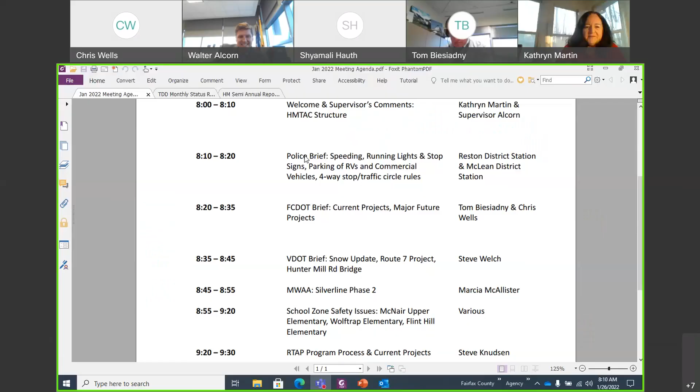Supervisor, did you want me to take off the agenda and give Chris presenter rights again? Yes, please. Okay, thanks. All right, Chris, you should be able to present your content now. See it? Okay, can you see it?

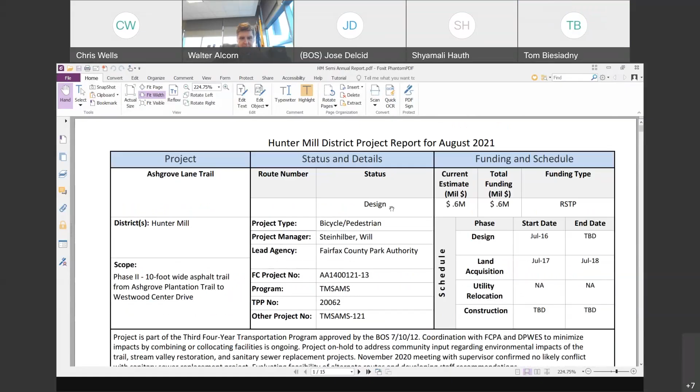So I sent this to Shyamali yesterday, and you guys can post it or distribute it. This is the Hunter Mill version of the semi-annual report to the board on transportation. I'll just go through it quickly. I know we have a lot on the agenda today, so we don't have a lot of highlights, and Steve Knudsen is with us to talk about traffic calming. But I'll quickly do some highlights from this document, and then if anyone has questions on any specific projects, Tom and I can answer.

Here in front of you, the long-awaited Beulah Road Walkway Phase 3, which is the section along Clark's Crossing, has been under construction. That's definitely something the community has been waiting for a long time.

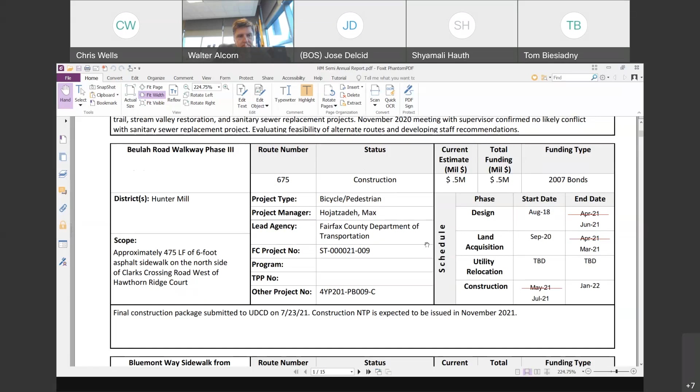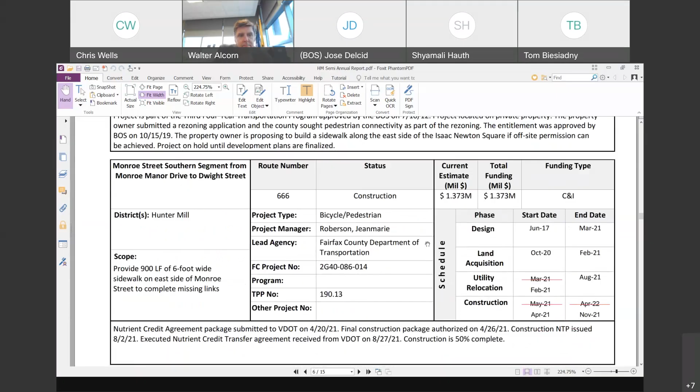Next one is on page 6: Monroe Street from Monroe Manor Drive to Dwight Street is a missing link that serves the Herndon Metro Station. That's been under construction as well for a while, so that's probably nearing completion.

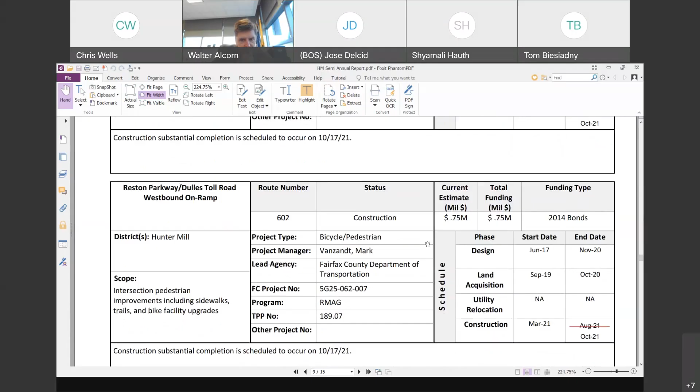Then on page 9, the Reston Parkway Dulles Toll Road ramps. We have both the westbound and eastbound ramps. Those were crosswalk projects, including a signalized crosswalk across Reston Parkway at the ramp, and those have been completed since we last met.

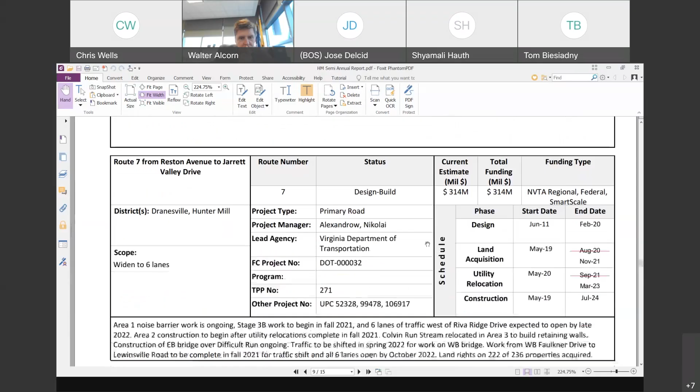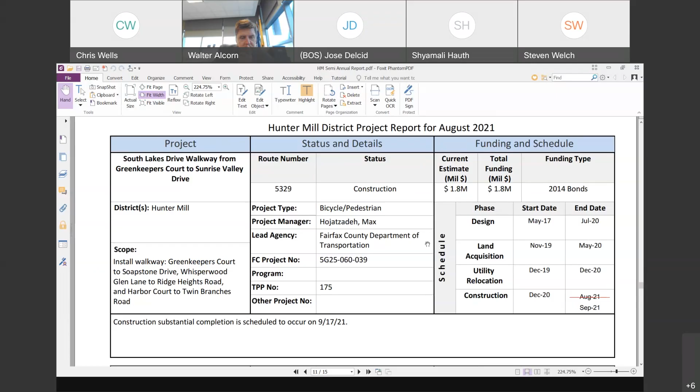Then on page 11, South Lakes' different segments between Greenkeeper's Court and Sunrise Valley - that's Greenkeeper's Court to Soapstone, Whisperwood Glen to Ridge Heights, Harbor Court to Twin Branches. That completes the corridor, so to speak, along, in particular, the area that feeds South Lakes High School, of missing links.

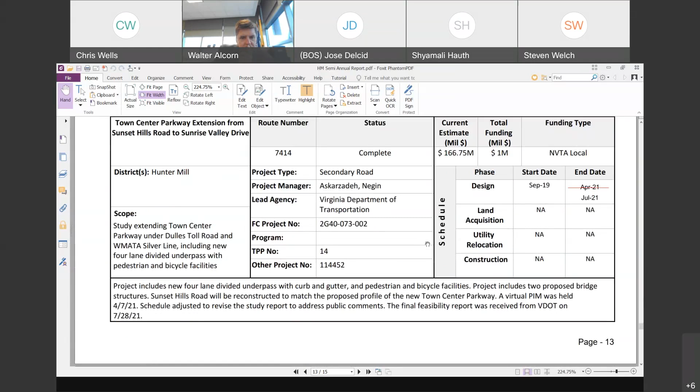And then lastly, on page 14, the Wiehle Avenue W&OD Bridge. The utility relocation has been ongoing, but the actual construction of that project is scheduled to begin this April. That's a year-long or more construction effort, but again, a major project long awaited by the community. So with that, I will take any questions quickly on projects.

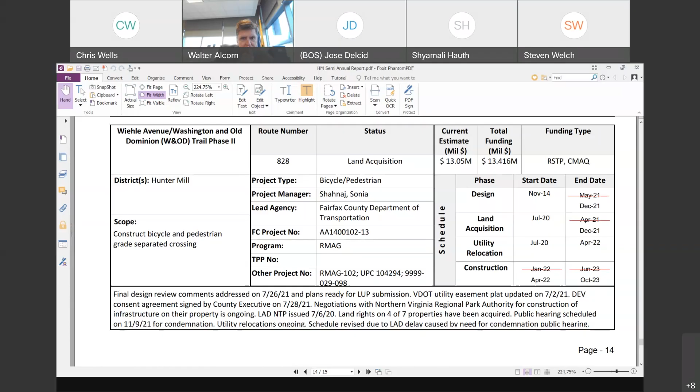Sure. So that's a project that probably this summer, maybe by our next meeting or the second meeting after that, we'd be ready to bring back to the community. Oh, I lifted up my laptop - now my head's cut off.

We are in a task order right now with a consultant where we're doing the preliminary drainage design and the sidewalk analysis. We'd originally been considering whether to just build inside the existing sidewalks, but we're doing an analysis now to see if it makes more sense to also make the sidewalks a consistent width for the 3.5 miles of the project. So it's not a light consideration, but something important to the community for consistency in cross sections. That work is just kicking off now.

We actually briefed Supervisor Alcorn and Supervisor Foust within the past month on that. As that consultant delivers that work, we should have something for this group, and really a public citizens information meeting on the actual project itself - I would say early summer, maybe late spring, but late spring to early summer.

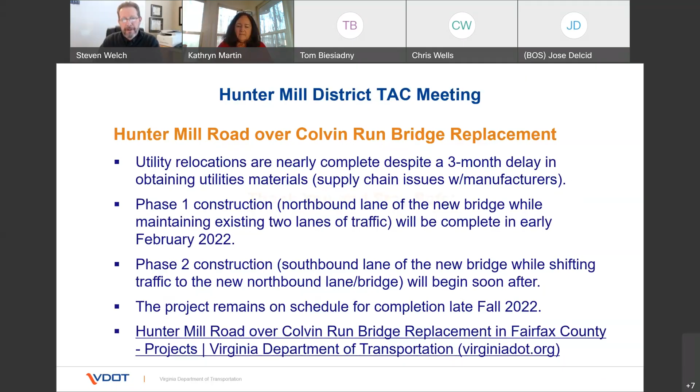And these are hyperlinks so that you can click on them and look up any information you may need. So for now, that's what I had. If you have any questions, feel free to let me know.

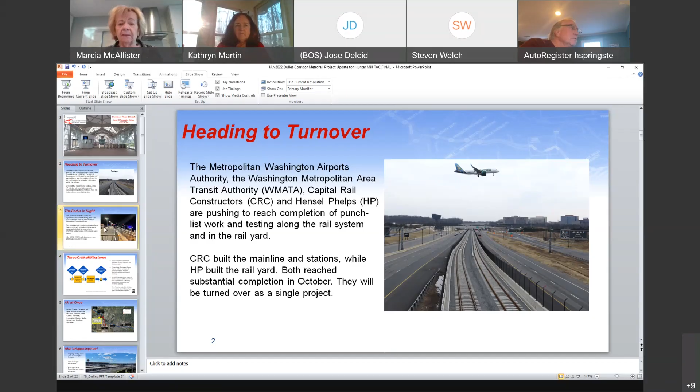And we can say the end is in sight. Unfortunately, we don't have what the end means to the public, which is opening, and we don't have a date for that.

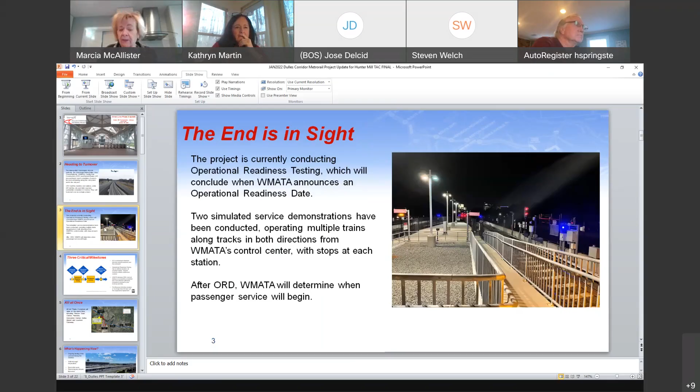As I said previously, the project is conducting operational readiness testing, and the difference in the testing that's going on now is we're doing the testing to prove to WMATA that we're ready to turn it over to them. When they can take it over and move into their own operational readiness testing is still a little bit up in the air - we're hoping within the next several months that will happen. Then at that point, WMATA will take over the line, but will be responsible for doing testing of their own, where they can be even more satisfied that this is going to be a safe and reliable project.

At some point after we moved into this, this chart has been used a lot. I don't know if anybody on this group has seen it, but it explains the milestones we're moving through now that I've been reviewing. If anybody would like this slide, we'll be happy to share it with you.

It's a WMATA slide, and it really does outline what they're doing. During this period, as I've said, we're headed toward operational readiness, and once we get to that phase, there's no time frame on it. It's however long it takes WMATA to complete the testing and get all the paperwork submitted, and then they can set a revenue date.

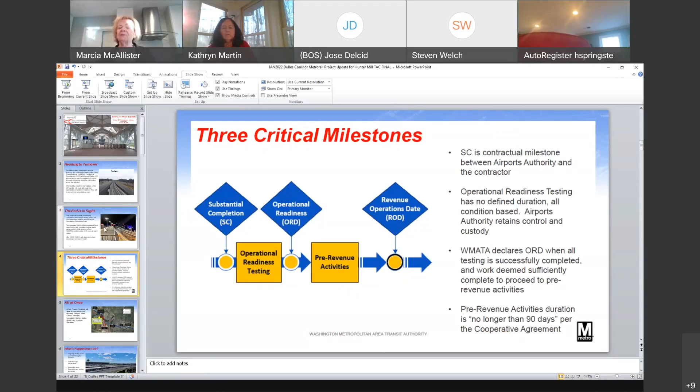But at this point in time, WMATA told me last week that the best estimate on that would be late spring. And late spring is not specific, but I think if we've learned one thing on this project, it's better to set a time frame than to put out a specific date, because we create disappointment and unhappiness when we give a specific date and don't make it.

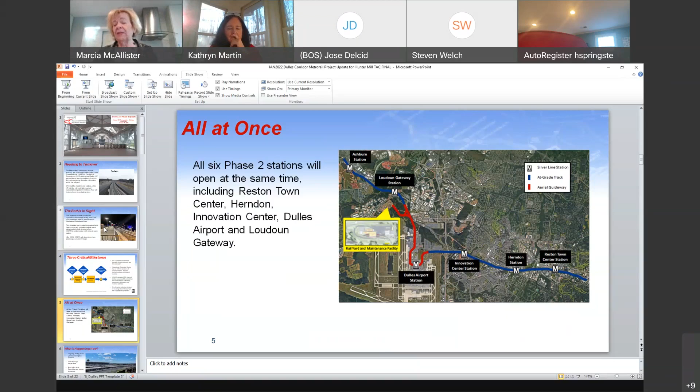We get this question all the time: is my station going to open before the other stations do? But all 6 stations will open at the same time, and I hope that assures people that one area is not going to get service before another. It's a continuous line, and you can't open it without the entire line.

In addition to the testing going on, we're doing a lot of walkthrough inspections, punch list work, and completion of lots of paperwork. That paperwork includes turning over all documentation to WMATA showing specifically what is built in every part of the line, in case issues come up so they'd know how to deal with it better in the future. When we do walkthroughs, it's like walking through your house—something's going to be out of place, maybe chipped paint or something like that. We walk through, WMATA walks through, the counties walk through, and if issues arise, we fix them as quickly as possible.

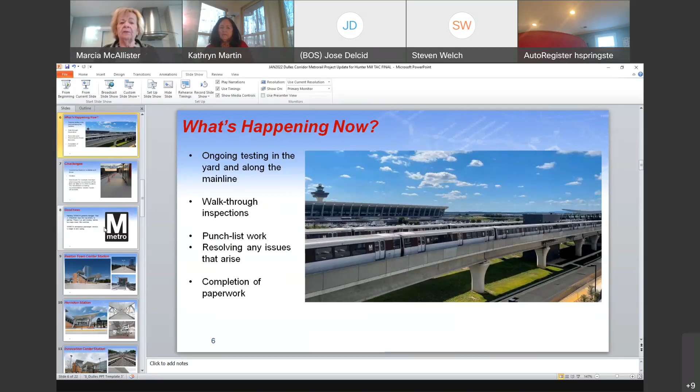We've had some challenges recently, especially since Christmas. The COVID impact on available workforce has affected the contractors, the subcontractors, the Airports Authority, and WMATA. When WMATA doesn't have crews to adequately run test trains, we can't test. When we don't have the right forces on hand to inspect and do things, it causes delays. Sadly, for the rail project, we've seen the effect of COVID more recently than we did last year.

The weather also has played heck with testing and working on the rail yard and on the line a bit. We've been able to proceed with inside work, but I think VDOT has a bigger job in this than we do for the public impact side right now.

One of the new issues that surfaced during the walkthroughs was problems with heat tape. Heat tape is a strip with electrical wiring heat devices inside it. It's attached to the third rail, and it keeps ice and snow from freezing on the rail. This was discovered during a walkthrough. It's not an uncommon problem on existing rail lines, and repairs have to be made frequently because the tapes do wear out.

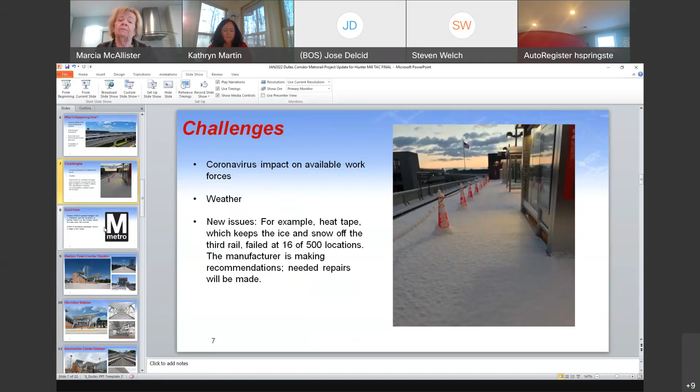Right now, though, most of these heat tapes have been in place for about 2 years, and during the walkthrough, there were 16 of 500 locations with problems. The manufacturer is on site doing root cause analysis, and we'll start repairing it as soon as their reports come in, which should be in the next week or so.

This is really good news. Not that Paul Wiedefeld is retiring—that's not good news, because he's been great to work with on this project—but he told us this week that his top priority before his summer retirement is to get Silver Line Phase 2 up and running. And as I said previously, he does expect passenger service sometime in late spring.

I'm going to show you some pictures, because I think at this point people are more excited to see what the stations look like and what's going on along the line than to just listen to me chat. This is the Reston Town Center Station—these are our latest pictures. As you can see, there's a very tall building in the background on the opposite side, which is, by the way, a Clark Construction building. Clark is also building the rail line—it's just a coincidence that they're there, but this gives you an idea of the kind of development already taking place around the station.

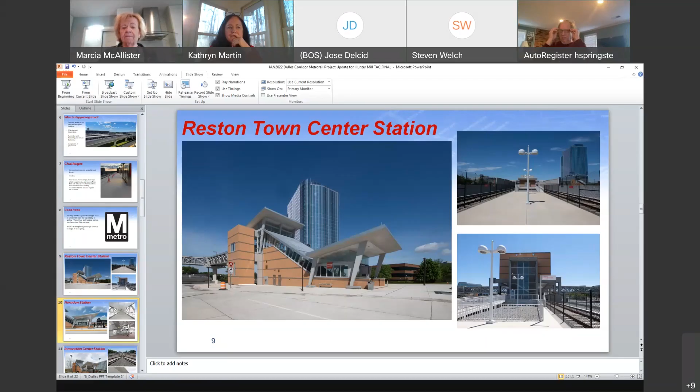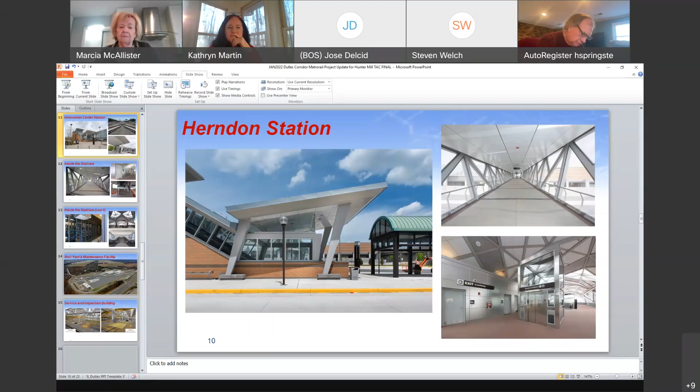Again, it's a completely different looking environment, even though it's exactly the same facility. Both pavilions are pretty much the same in each one, but this one is very much suited for the area around this station and the nearby development.

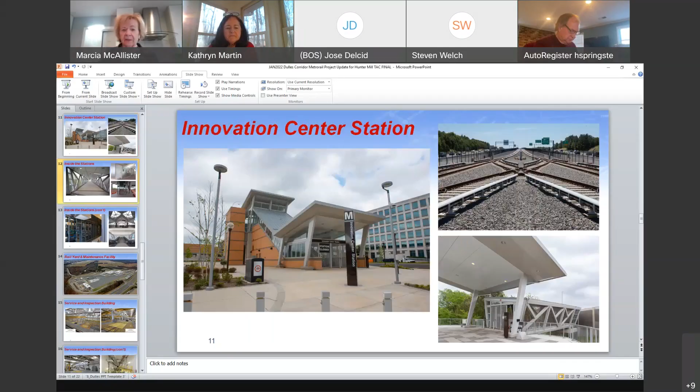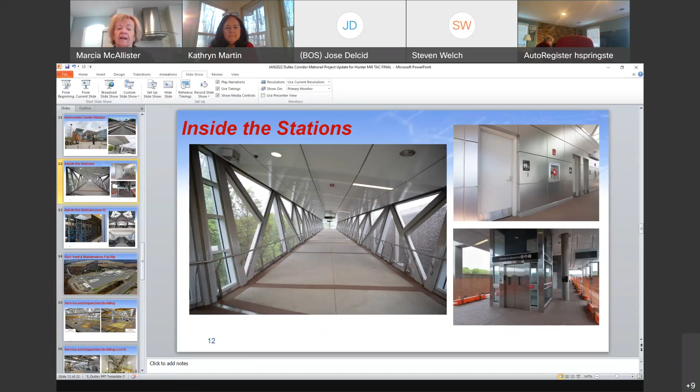Next slide, please. Okay, do we not have the next slide?

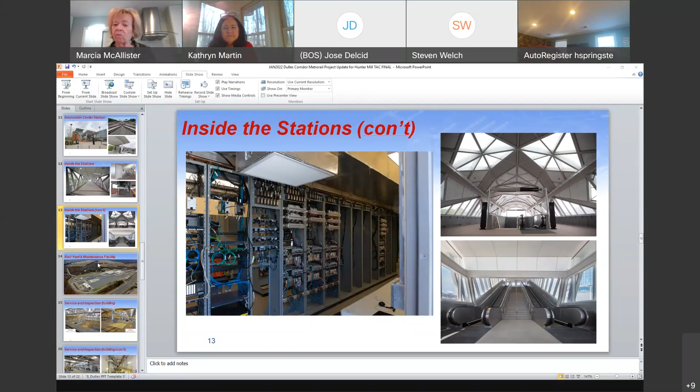Next slide. I wanted to take a few minutes to give you an update on the rail yard, which is being built by Hensel Phelps. If you look at the yard, this is a drone view, I think. Looking down, you can see the proximity of the rail yard to the runways at Dulles Airport.

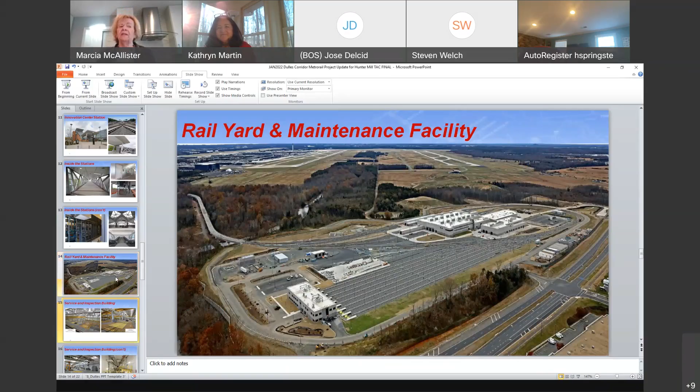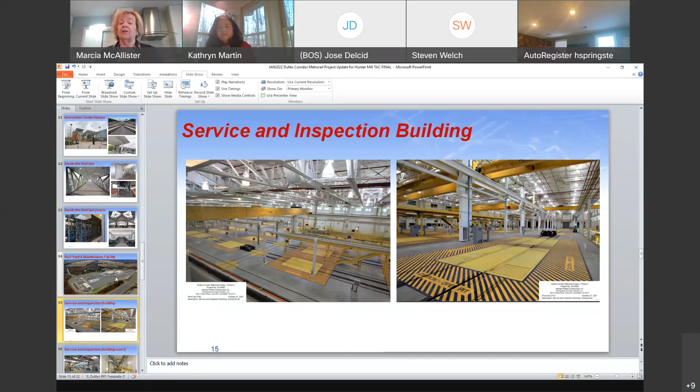The rail yard facility is running a little bit behind on getting the interiors up and ready to run because it's so complex. It's the train wash facility, and the items that can lift the equipment, the actual train cars, into the air for maintenance, repairs, washing, etc. It's really exciting to see coming into place. It will create about 300 jobs for the future, right off of 606.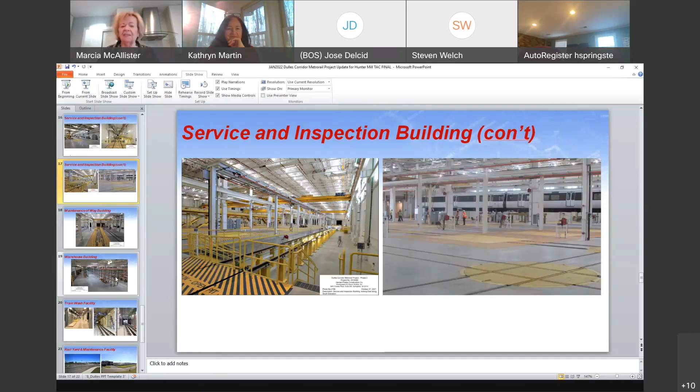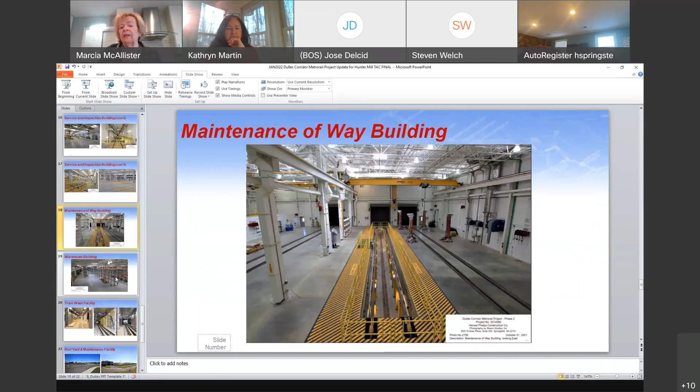This is the service and inspections building. You can see this picture has little tiny people in it. Next slide - this is what's called the maintenance of way building. You can see the tracks where the trains will come into, and again, just an interior shot.

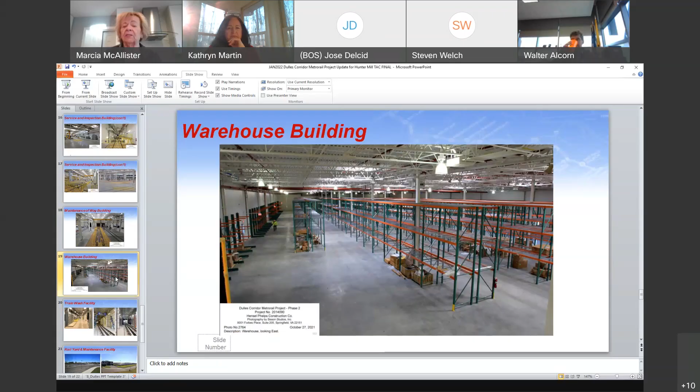I know we've had questions occasionally from this group about the status of the yard, and so far, it'll be there when it needs to be there. I'll be happy to answer any questions anybody has.

I don't see any hands at the moment. Okay, all right. Oh good, but I'll be happy to answer them, and anybody can call me and ask. Okay, thank you, Marcia, excellent presentation. It's wonderful to see your face again. You're right, it has been a while.

So we're going to go ahead and move on, before we go into the school zone safety issues. I have two comments. One is I did receive a private chat having to do with the police briefing - the person who was planning on making the presentation has an illness in the family and has left town, so we're going to defer that agenda item until our next meeting, April 27th.

The second issue, so that you have an opportunity to think about it - I am going to call on Howard, and since the town of Vienna is a member of this committee and Reston Association is a member of this committee, I'm going to call on Howard and Larry before we go into the questions, just to see if there's anything they wanted to quickly comment on and update us. That being said, let's move on into the school zone safety issues.